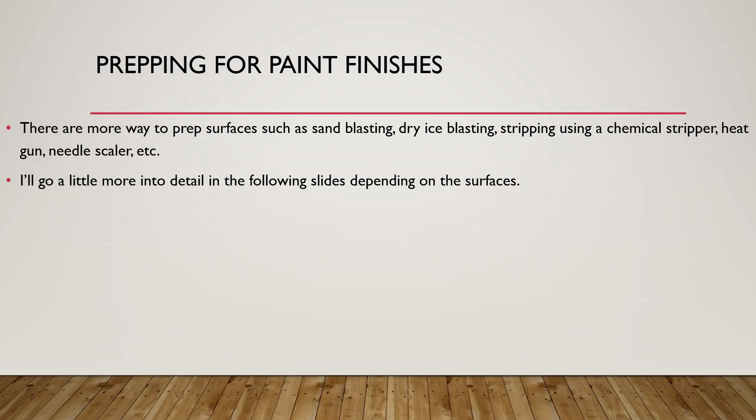There are many ways to prep surfaces, such as sandblasting, dry ice blasting, stripping using chemical stripper, heat gun, needle scaler, whatever. There are multiple ways of prepping a surface apart from sanding and using grinders and brushes. I'll go into more detail in the following slides depending on the surface, but that'll be later on.

So, preparing for paint finishes - how do you prepare for that? Most likely you're going to move a client's things if they're present. Typically, a lot of clients will leave their stuff even after you told them to move it. So you always got to consider that.

You're going to want to protect the work site using plastic, rosin paper, drop cloths, ram board, or whatever you're going to use. Tape should be used on the surface being taped. I'll go into detail on that later.

You'll prep based on information mentioned previously, depending on the location. Remember to always check for humidity and moisture. This is a sign that you'll need to degrease before you do any other step. Kitchens and bathrooms are almost a guarantee.

If removing wallpaper, make sure to remove the glue underneath completely, or it will blister the paint on the wall. So if you ever remove wallpaper, you know that you're gonna want to wet the wallpaper. They even sell these little scuffing pads, but I've never done that - I just give it a light sanding and start wetting.

Underneath, though, you're gonna get some glue. Make sure you get some TSP, some Goof Off, mix it in with some water and clean those walls, because that glue will be on there for a long time if you don't clean it. So get your sponges, your scotch pads, whatever you're gonna need.

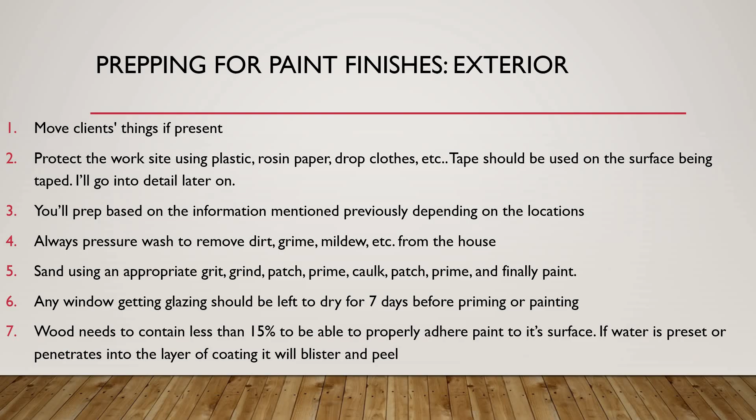All right, composition of paints in construction. There are 5 main properties in paints. These are pigments, and what they do is they provide color, opacity, and sometimes corrosion resistance. There's binders, also known as resins - they help the paint adhere to surfaces and form a protective film.

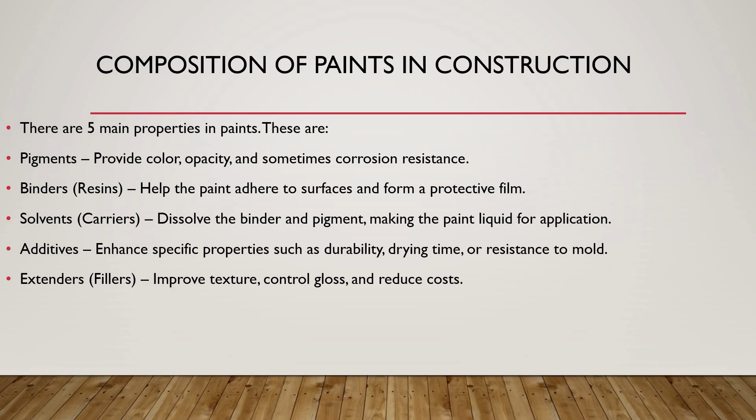You got solvents, so carriers - it dissolves the binder and pigment, making the paint liquid for application. You got additives, which enhance specific properties such as durability, drying time, and resistance to mold. And finally, you got extenders, also known as fillers - this improves the texture, controls the gloss, and reduces the cost.

So these properties have different jobs in the paint product. You got adhesion, the ability to stick to different surfaces like concrete and metal. You got durability - all these properties are affected differently. You got the resistance to environmental conditions like UV exposure, moisture, and abrasion.

You got opacity, also known as hiding power - the ability to cover the surface and conceal underlying materials. You got your drying time, the time required for the paint to set and properly cure. Some paints dry in 1 day, some take 7 days to fully dry out - that all depends on what's been added to the paint. You got your gloss and sheen, the level of light reflection.

So it could be satin, matte, high gloss, etc. You got your weather resistance, right? The protection against rain, humidity, temperatures. Chemical resistance, ability to withstand exposure to chemicals, oils, and solvents. Flexibility, resistance to cracking and peeling due to expansion. You got washability, ease of cleaning without damaging the paint. You got toxicity and VOC content. So a lower volatile organic compounds reduce environmental and health hazards.

So just remember, these are little keywords when it comes to painting. Most likely this will be brought up on the exam. So you don't got to know everything in painting when it comes to wording or vocabulary, but these are some of the most important parts.

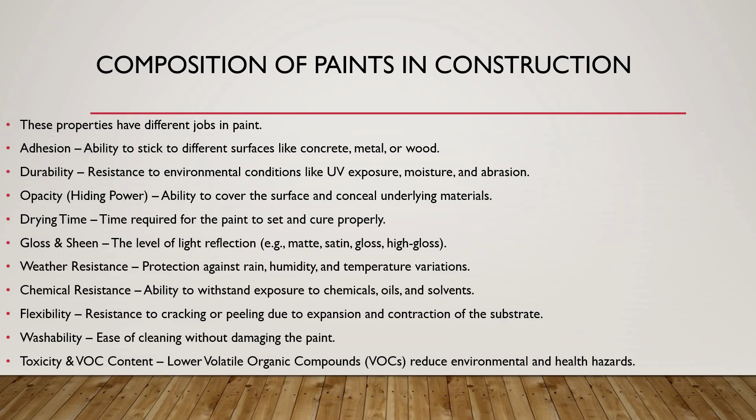So we're going to go into detail what each one means. So adhesion ensures the paint sticks well to the surface, preventing peeling and flaking over time. And this is important for surfaces like concrete, metal, or wood, which may require primers for better adhesion.

You got durability, determines how long the paint lasts under different conditions, right? High durability means the paint resists fading, cracking, and peeling over years of exposure. You got opacity, hiding power. So it defines how well the paint covers the surface underneath.

So typically, what color are you painting, right? So if it's like a super dark color and you're gonna go with the lighter on top, you want something that's gonna cover that dark color. This will affect the number of coats required to completely cover a previous color or stain.

You got your drying time. This will impact how quickly the paint sets after application. Faster drying times can speed up construction projects, but may require careful environmental conditions.

You got your gloss and sheen. So glossy paints reflect more light and are easier to clean, but may highlight imperfections. Matte finishes hide surface flaws but are harder to clean and maintain. So remember, the glossier, the better it is to clean, and the flatter, the harder it is. But again, gloss you'll see everything more in view in terms of all defects, and if you go with the flatter finish, of course you're going to see less imperfections.

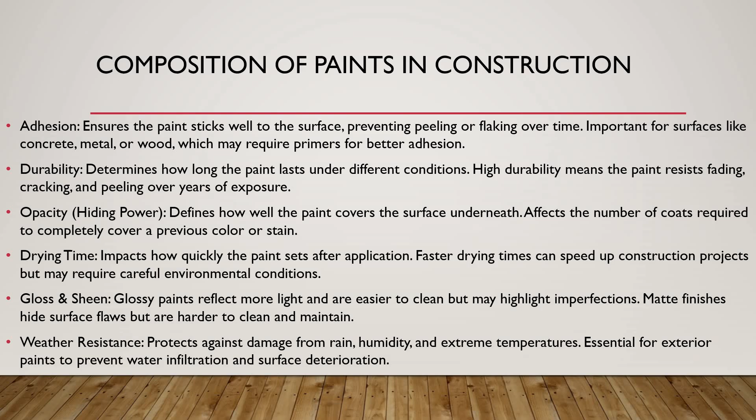So weather resistance protects against damage from rain, humidity, temperature exposure, essential for exterior paints to prevent water infiltration and surface deterioration.

So what's chemical resistance? Chemical resistance helps the paint withstand the exposure to cleaning agents, acids, oils, and other chemicals. It's important for industrial or high traffic areas where exposure to chemicals is frequent.

Flexibility allows the paint film to expand and contract with temperature changes without cracking, crucial for exterior paints, especially in areas with significant temperature fluctuation.

Washability determines how easily stains and dirt can be wiped off without damaging the paint. So higher washability is needed for kitchens, bathrooms, and commercial spaces.

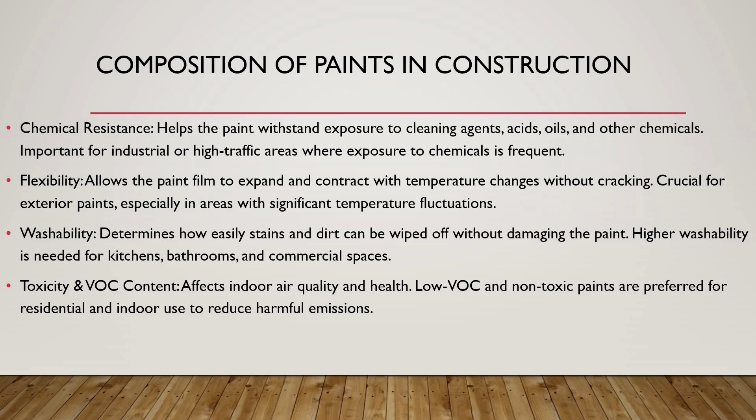You got toxicity and VOC contents. This will affect indoor air quality and health. Low VOC and non-toxic paints are preferred for residential and indoor use to reduce harmful emissions.

So what are solvents? Solvents are liquids used to dissolve and disperse the binder, the resin, pigments, additives in paints, making it easier to apply. Once the paint is applied, the solvents evaporate, leaving behind a solid film.

So what are the functions of solvents in paints? So this will adjust viscosity, meaning it controls the thickness of the paint for smoother applications. It improves application, so helps the paint spread evenly on surfaces using brushes, rollers, and sprayers.

And this will also aid in drying. So solvents will evaporate after application, allowing the paint to harden and form a durable coating. This will also prevent clumping, so it keeps paint ingredients well mixed and prevents premature drying in the can, and enhances surface penetration, so it helps paint seep into porous surfaces like wood and concrete for better adhesion.

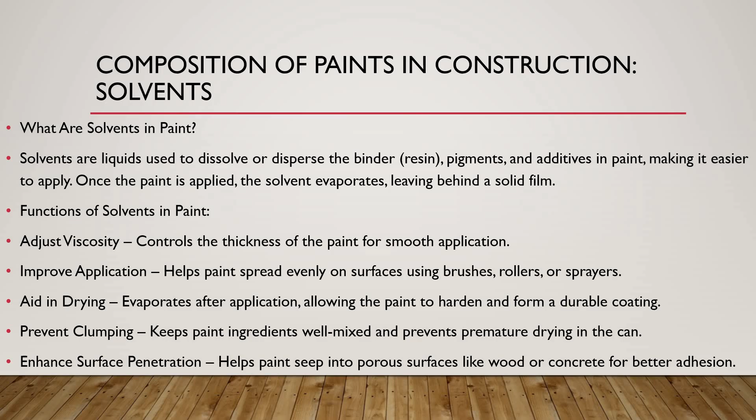So what type of solvents are in paint? So you got water, which is water-based paints used in latex and acrylic paints. So they got low toxicity, low odor, and are environmentally friendly. You got faster drying time and easy cleanup with water.

Next, you would have your organic solvents. This is better known as oil-based paints. So used in alkyds, epoxies, polyurethanes, enamel paints. So stronger adhesion and durability, but higher VOCs. So it's more dangerous, more toxic.

An example of these that I'm pretty sure you guys have all seen are your mineral spirits, so common in alkyd paints. You got your turpentine, traditionally used for oil-based paints. You got your xylene and toluene, found in industrial coatings. You got your acetone and alcohol, so used in specialty paints and primers.

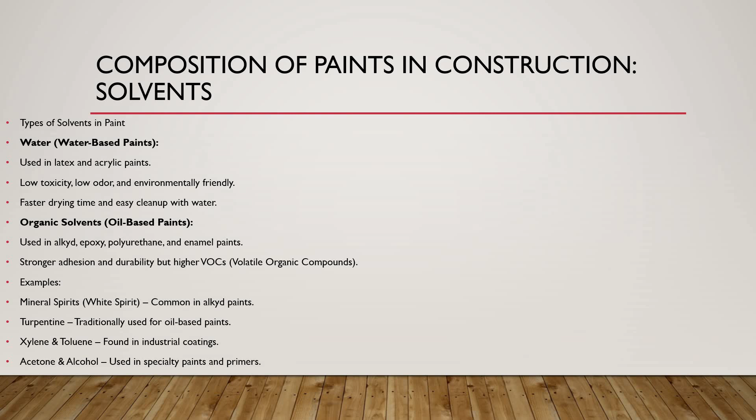So I'm just gonna give you guys a little quick heads up on the paints there are. The paint type: you got your latex or acrylic paint. The solvent will be your water base, low odor, easy cleanup, and quick drying.

You got your alkyd paints, which is your oil-based paint. The solvent would be mineral spirits and turpentine. It's better because it has a strong adhesion, but it does take longer to dry, obviously.

You got your epoxies, typically, and your polyurethane paints. Typically these are made from xylene or toluene. It has high durability and chemical resistance.

You got your lacquers and industrial coatings. Typically these are made from acetone or alcohol, and they're fast drying and produce a high gloss.

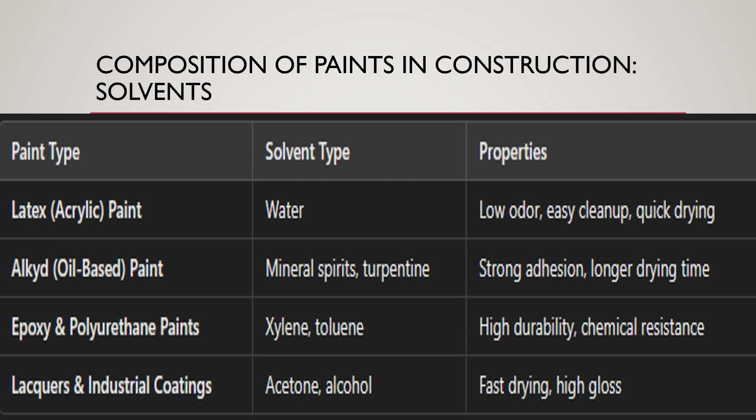What are binders in paint? Binders, also known as resins, are the film-forming components in paint that hold the pigment particles together, and help paint adhere to a surface. Once the solvent evaporates, the binder hardens to form a protective and durable film.

Functions of binders in paint: adhesion - it helps the paint stick to surfaces like wood, metal, and concrete or drywall. Durability - determines the paint's resistance to weather, moisture, and wear. Flexibility - it helps prevent cracking and peeling by allowing the paint film to expand and contract.

It also controls, or helps with, the gloss and finish, so this will control the sheen level - whatever you're choosing. So it could be a matte, satin, semi-gloss, high gloss, whatever it might be.

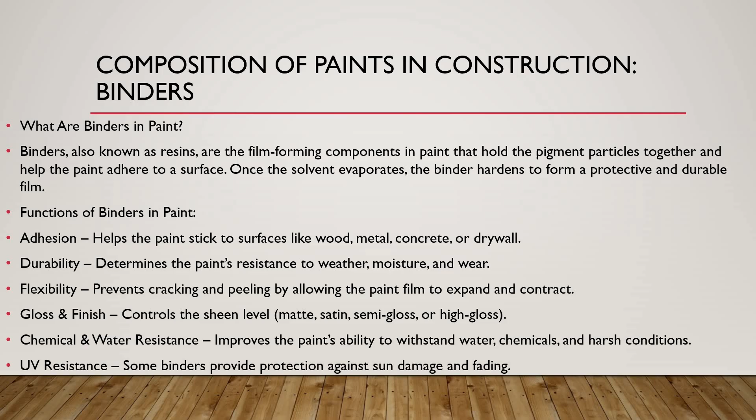You got chemical and water resistance, right? It improves the paint's ability to withstand water, chemicals, and harsh conditions. And it will also provide UV resistance - some binders provide protection against sun damage and fading.

And here we have basic binder types. If we're dealing with acrylic, remember this will typically be latex paints and exterior paints. So you got quick drying and UV resistance if it's for exterior, and it's flexible.

If you're dealing with any alkyd paints, so oil based, the common uses for that would be for wood, metal, industrial paints. So the properties would be that it's durable and glossy and slow drying.

An epoxy will typically be used in industrial and marine and flooring paints. So of course it's going to have strong adhesion and chemical and water resistance.

If you're dealing with polyurethane, it will typically be used in wood finishes and floor coatings. So it's tough, abrasion resistant, and glossy.

If you're dealing with vinyl, it will typically be used for interior latex paints, and it's an economy paint. So it's typically affordable, not expensive. It has good adhesion, it's cost effective, however it is less durable than acrylic.

You also have your silicone binder. Silicone binders offer high temperature coatings and waterproof paints. Typically these are used like on roofings - on roof coatings where you got flat roofs, and you would roll on the roofing material. So it's heat resistant, water repellent, and flexible.

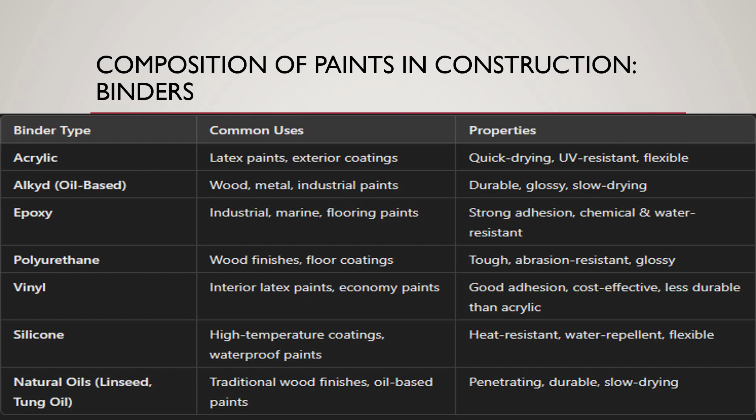So how do binders affect paint performance? Acrylic binders are common in water-based paints. They offer flexibility, quick drying, and UV resistance. Alkyd binders are found in oil-based paints, providing durability and a smooth finish, but require longer drying times.

Epoxy and polyurethane binders are used in high-performance coatings for industrial, marine, and flooring applications. Silicone binders make paint resistant to heat and moisture, making them ideal for waterproofing and exterior protection.

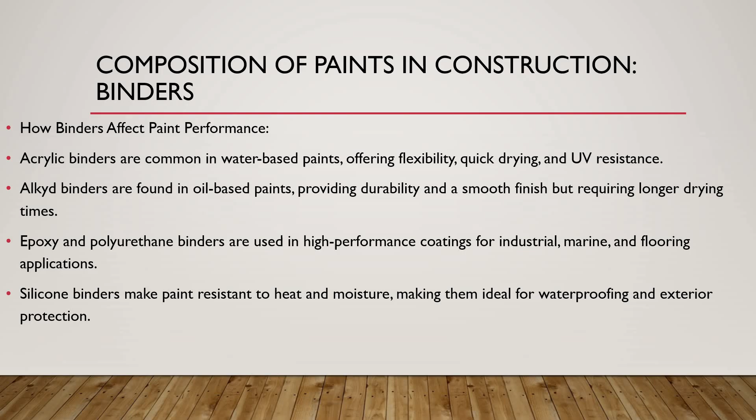What are pigments in paints? So pigments are finely ground solid particles that give paints their color, opacity, and protective properties. They do not dissolve in the binder or solvent, but remain suspended in paint mixtures. So they stay throughout the paint, right? They're not at the bottom, they're at the top. They're moving constantly.

The functions of pigments are to provide color - this will determine the paint's appearance from bright hues to neutral tones. It improves opacity, right, the hiding power, because obviously what color are you going to be going over? So it helps cover underlying surfaces and previous colors.

It enhances durability - some pigments protect against UV rays, corrosion, and weathering. It increases reflectivity or absorption - some pigments influence how heat and light interact with the painted surface. It reduces cost - extender pigments help bulk up the paint while maintaining quality.

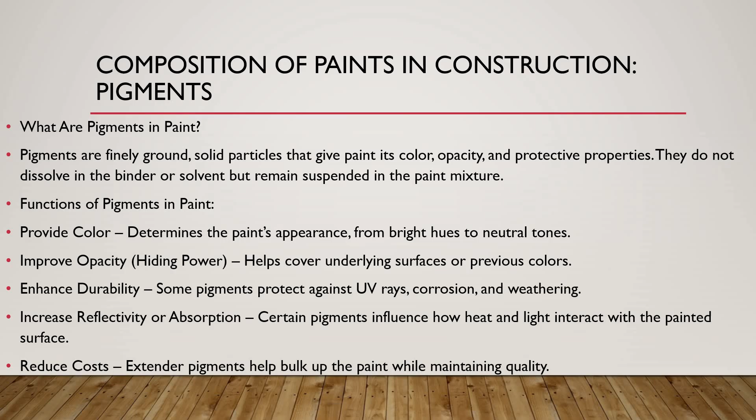So, types of pigments in paints. Prime pigments, also known as color pigments, provide actual color and opacity in the paint. An example would be titanium dioxide.

It's a bright pigment with excellent hiding power. You've got iron oxide, which provides reds, yellows, and brown shades common in industrial and exterior paints. You've got carbon black, used for deep black shades and coatings in automotive paint. You've got chromium oxide green, a stable green pigment often used in exterior and industrial applications. And ultramarine blue, a deep blue pigment used in artistic and decorative paints.

So these are all different pigments in paints, and of course there's more - there's mixes, there's a bunch of stuff out there. We also have extender pigments, also known as fillers. Each one does something different. These extender pigments improve texture, strength, and cost effectiveness, but do not contribute to color.

The ones on top are called color pigments, and they offer the look of whatever color you want. The ones on bottom just help with the next step in paint - the texture and the strength. An example would be calcium carbonate, that's chalk. It reduces the gloss, also known as a flattener, improves adhesion, and enhances durability.

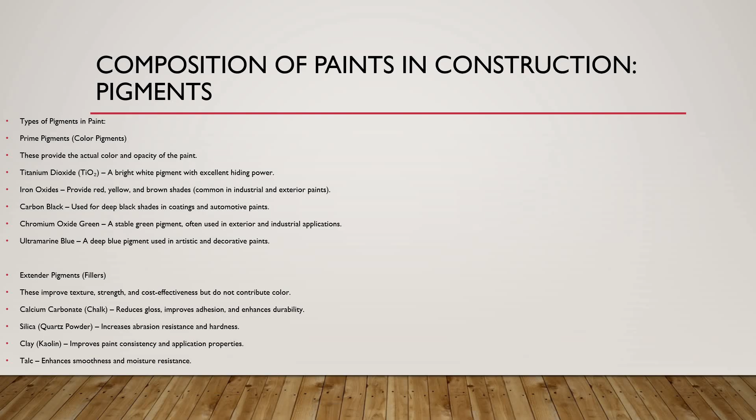You've got silica, your quartz powder - it improves abrasion resistance and hardness. You've got clay, also known as kaolin - it improves paint consistency and application properties. And you've got talc, which enhances smoothness and moisture resistance.

You've got your special effect pigments as well - these provide functional properties beyond color. Metallic pigments, also known as aluminum, bronze, zinc dust, are used in coatings for corrosion resistance and reflective finishes.

You've got fluorescent and phosphorescent pigments - these would glow in the dark or offer high visibility coating. This would be like for the streets or any marked area for parking.

You've got anti-corrosion pigments, so this would be your zinc phosphate and red lead. It protects metal surfaces from rust - remember, this would be more like your rust inhibiting primer. And you've got thermochromic and photochromic pigments - these change color with temperature and light exposure.

How do pigments affect paint performance? The more pigments you have, the better hiding power, so your higher opacity. High quality pigment resists fading under UV light and weather exposure. Certain pigments improve durability, preventing rust or chemical damage.

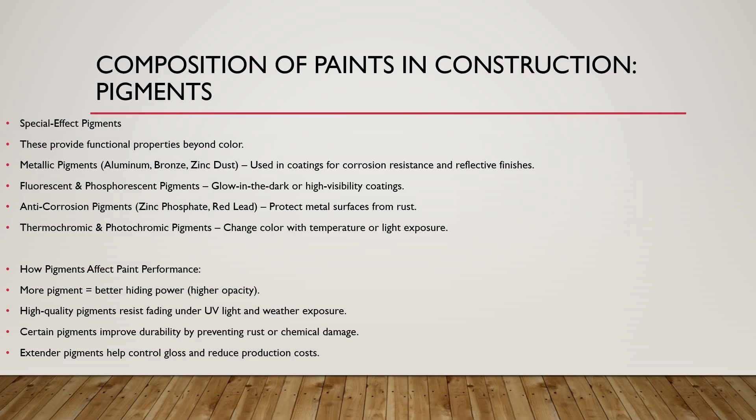Extender pigments help control gloss and reduce production costs. So remember, the more pigments in the paint, the better - that's pretty much what this is saying.

So, what are additives in paints? Additives are special ingredients added in small amounts to enhance the performance, durability, and application properties of paint. They improve characteristics such as drying time, resistance to mold, ease of application, and weather protection.

Functions of additives in paint are what? It will improve flow and leveling, preventing brush or roller marks for a smooth finish. It will control drying time, speeding up or slowing down drying based on environmental conditions. It will enhance durability, providing resistance to moisture, UV rays, chemicals, and abrasion.

It will also prevent mold and mildew growth, which is essential for high humidity areas like bathrooms and kitchens. Another function would be to reduce surface defects, preventing issues like bubbling, sagging, and cracking. And lastly, it will modify gloss and texture, controlling the sheen and feel of the dried paint - some paints are rougher, some are smoother. That's what it means by that.

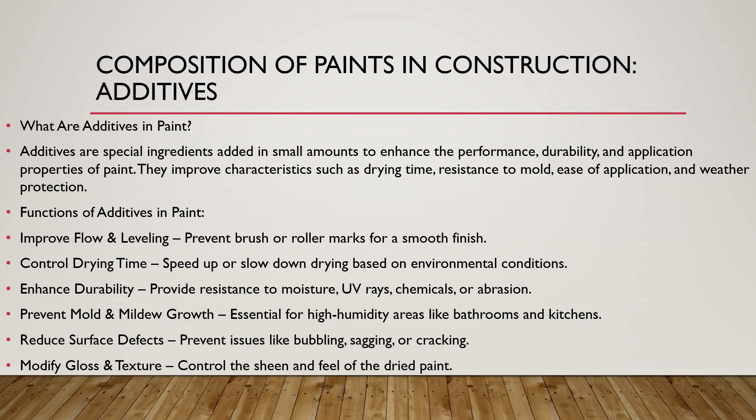So here we have the types of additives that are in the paint. You've got anti-settling agents - this will prevent pigments from settling in the can, so it helps so that it doesn't stay at the bottom where it will settle down. This helps maintain consistency in stored paint.

You've got your thickeners and rheology modifiers - this will control the viscosity, the thickness, preventing dripping and improving application. You've got your drying accelerators, your catalysts - if you don't know what a catalyst is, it's pretty much like a two-part epoxy. You've got your regular paint, and then you've got your hardener.

That's what a catalyst is. It speeds up drying time, useful in cold weather or for quick drying paints.

You've got your retarders, slow drying agents. Instead of accelerating the drying process, they make it dry out slower, helping you work with the product more. It slows down drying time, which helps when painting in hot or dry climates.

You've got your UV stabilizers, which protect against sunlight and fading, typically used in exterior paints and automotive coatings. And your anti-foaming agents, which prevent bubbles and foaming, ensuring a smooth, uniform finish.

You've got your fungicides or mildewcides, which prevent mold and mildew, typically used in bathrooms, kitchens, and humid environments. Corrosion inhibitors protect metal surfaces from rust, typically used in industrial and marine coatings. Adhesion promoters improve paint grip on difficult surfaces, typically used on plastic, metal, and glass coatings.

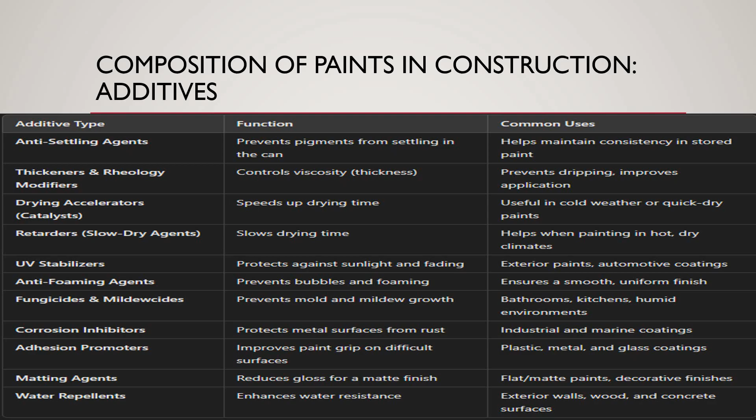So how do additives affect paint performance? Anti-foaming agents prevent air bubbles that can ruin a smooth finish. Thickeners help paint stick to vertical surfaces without dripping. This is why some paints run faster than others - even just brushing it on, some paints just won't stick no matter what, and you'll get runs, drips, and little saggings going on.

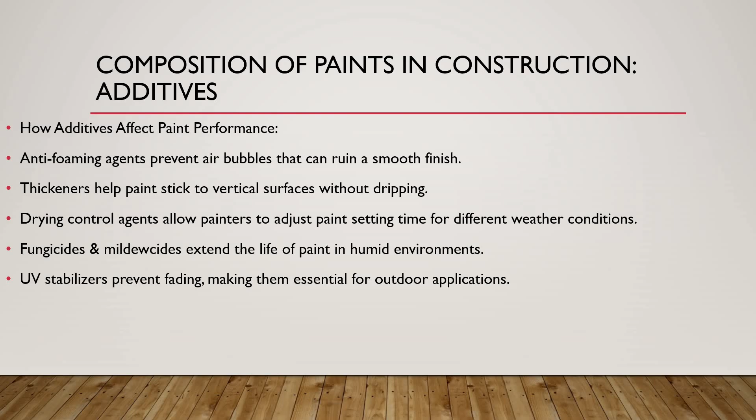You've got your drying control agents, which allow painters to adjust paint setting time for different weather conditions. Fungicides and mildewcides extend the life of paint in humid environments. And UV stabilizers prevent fading, making them essential for outdoor applications.

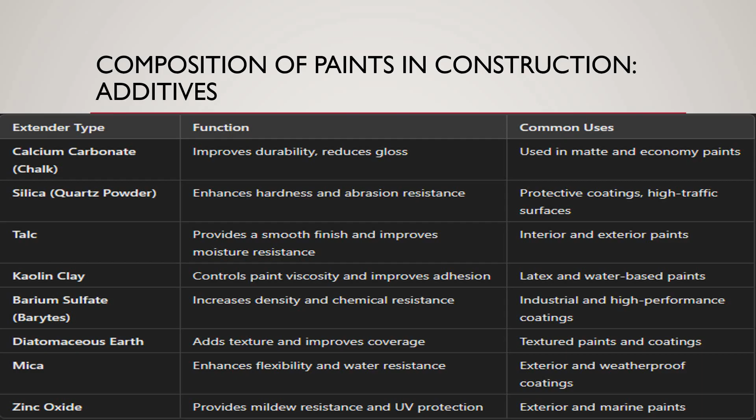So how do extenders affect paint performance? Higher extender content means lower gloss. The more you extend or reduce the paint, the flatter it's going to start looking, and it's going to start affecting the color that it has. Silica-based extenders increase hardness, making paint more durable for floors and industrial use.

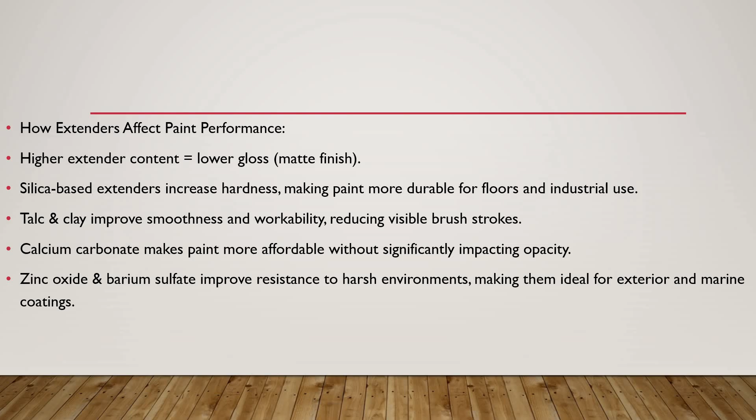You've got your talc and clay, which improve smoothness and workability, reducing visible brush strokes. Calcium carbonate makes paint more affordable without significantly impacting opacity. And zinc oxide and barium sulfate improve resistance to harsh conditions, making them ideal for exterior and marine coatings.

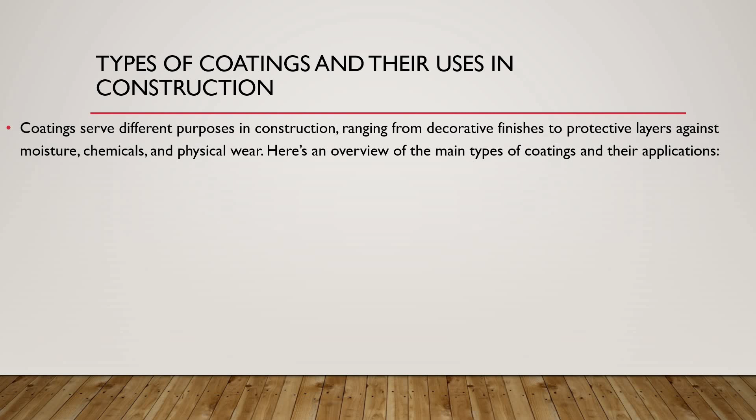Now we're going to go into something different: types of coatings and their uses in construction. Coatings serve different purposes in construction, ranging from decorative finishes to protective layers against moisture, chemicals, and physical wear. Here's an overview of the main types of coatings and their applications.

So these are your basic paints that most likely your store has. What's the purpose of a paint? The purpose of it is to provide color, aesthetics, and some level of protection against weather, moisture, and UV rays. That's why you paint an exterior - it's not just to make it look good, it's also to protect the wood, to protect the building from exposure to weather, bugs, dust, and anything that could enter a home. That's what it's meant for, apart from giving it a good amount of color to make it stand out.

So we're going to go with paint types. Acrylic, also known as latex paint, is a water-based paint. It's quick drying and has low VOCs. It's typically used in interior and exterior walls and ceilings.

You've got your alkyd-based paints, which give a durable, smooth finish and have a longer drying time. This is typically used on wood, metal, trim, and doors. You've also got your epoxy paints.

This is typically used for its high durability and chemical resistance. It's typically used in industrial floors, garages, and marine applications.

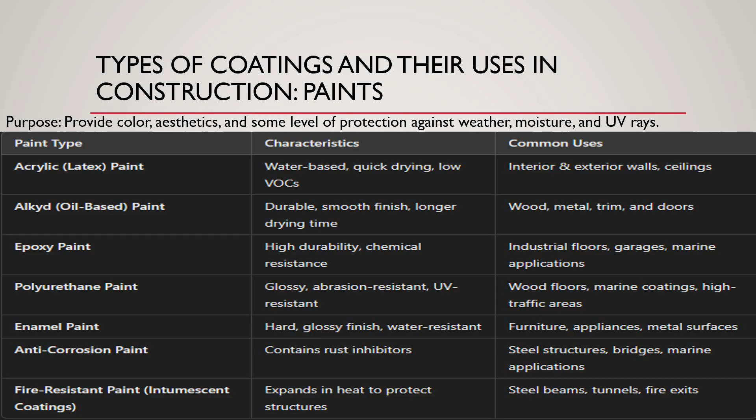So what are sealers and primers? The purpose of a sealer and primer is to improve adhesion, block stains, prevent moisture penetration, and enhance the durability of top coats.

An acrylic primer seals porous surfaces and improves adhesion. This can typically be used on drywall, masonry, and previously painted surfaces.

Next up is your alkyd primer. It offers better penetration, but has a longer drying time. This will typically be used on wood, metal, and exterior surfaces.

Shellac-based primer is your strong stain blocker. It will block smoke damage, water stains, and wood knots.

You've got your concrete sealers. This will protect against moisture, chemicals, and wear. Typically used on concrete floors, driveways, and basements.

You've got your waterproofing sealers. This will create a water-resistant barrier. This is typically used in basements, foundations, and bathrooms.

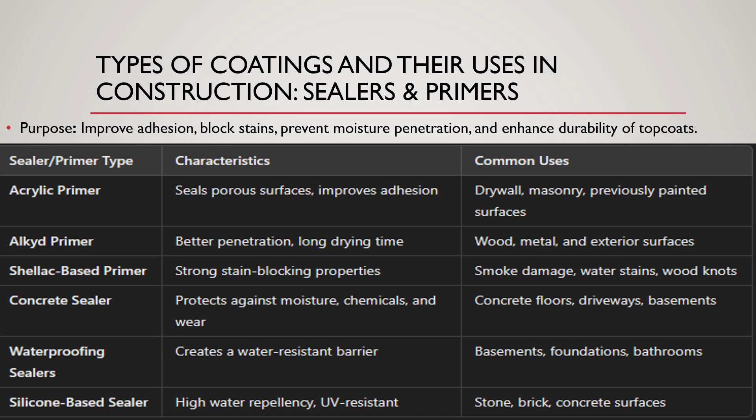Lastly, you'd have your silicone-based sealer. This offers high water repellency. It is UV resistant and is typically used on stone, brick, and concrete surfaces.

Now we're going to go on to epoxy coatings. The purpose of epoxy coatings is that it's a heavy duty coating providing chemical resistance, durability, and waterproofing. So there are different types of epoxy. What are they?

100% solid epoxy is thick, self-leveling, and highly durable. Typically this will be used in industrial floors, factories, and warehouses.

You've got your solvent-based epoxy. This will penetrate the surface and has good adhesion. This will be used on concrete coatings and garages.

You've got your water-based epoxies. The water-based epoxy offers lower VOCs and easier application, and is typically used in commercial floors, hospitals, and homes.

You would then have metallic epoxy. This is more of a glossy decorative finish. This will be used in showrooms, restaurants, and high-end interiors.

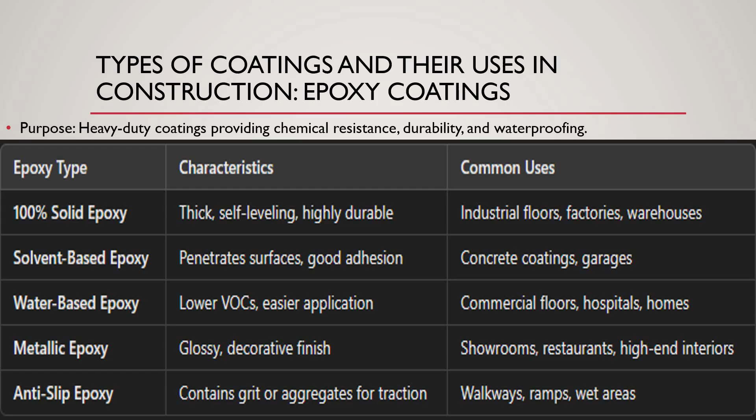Lastly, you'd have your anti-slip epoxy. This contains grit or aggregates for traction. This will be used in walkways, ramps, and wet areas.

Now we have polyurethane coatings. The purpose of a polyurethane is to provide a high gloss, UV resistant, and abrasion resistant surface. We've got different types of polyurethane.

Those would be your aromatic polyurethane. It has high durability, but it's UV sensitive, so it's not going to last long in the sun. This would be more for interior use, for industrial coatings and chemical plants.

You've got your aliphatic polyurethane. This is UV resistant and has a glossy finish. Because of its UV resistance, it would typically be used in outdoor furniture, floors, and automotive coatings.

And lastly, you've got your moisture cure polyurethane. It is tough and chemical resistant, and it's typically used in wood floors, gymnasiums, and marine coatings.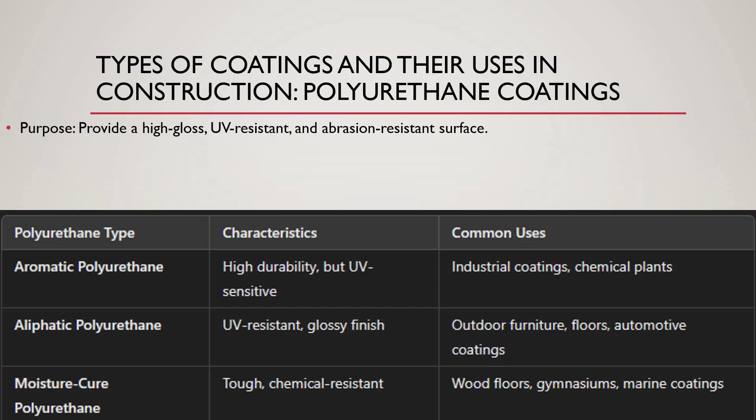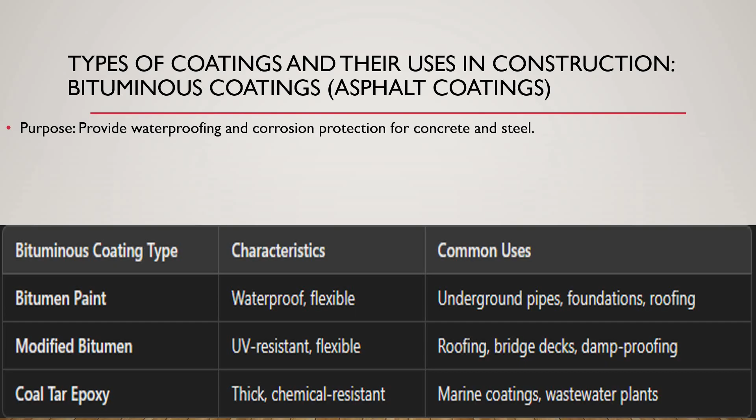You got your modified bitumen. It is UV resistant, flexible, and typically used in roofing, bridge decks, and damp proofing. You got your coal tar epoxy. Think of this as a thick, chemical resistant epoxy. It will be used in marine coatings and wastewater plants.

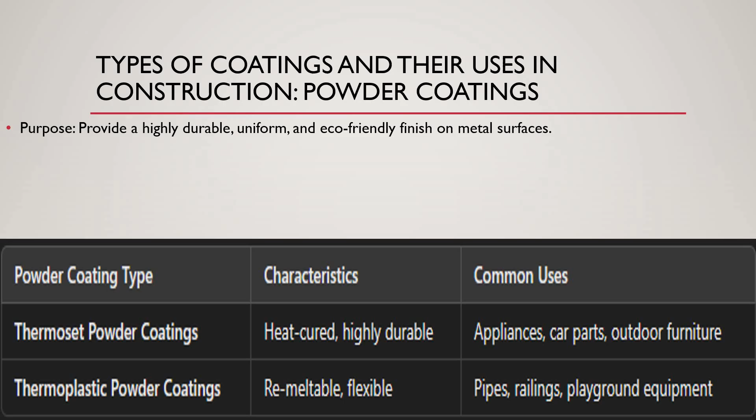So let's go on to powder coatings. What do they do? They provide a highly durable, uniform, and eco-friendly finish on metal surfaces. You would have only two types of this sort of coating. You got your thermoset powder coating, it's heat cured, highly durable, and typically used on appliances, car parts, and outdoor furniture. You got your thermoplastic powder coating, it is remeltable, flexible, and typically used in pipes, railings, and playground equipment.

You got your anti-corrosion coatings. Typically this will prevent rust and degradation of metal surfaces. So this will prevent rust from forming and help it stay as good as it can get when you're dealing with exterior metal, because over time it will rust.

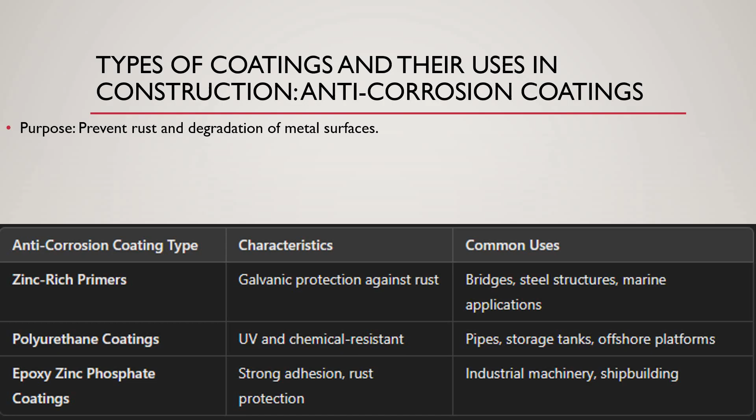So these are anti-corrosion coating types. You got your zinc-rich primers, so it's galvanic protection against rust, typically used in bridges, steel structures, marine applications. You got your polyurethane coatings, this will be UV and chemical resistant, typically used in pipes, storage tanks, offshore platforms. And you got your epoxy zinc phosphate coating, it has strong adhesion, rust protection, and will be used in industrial machinery and shipbuilding.

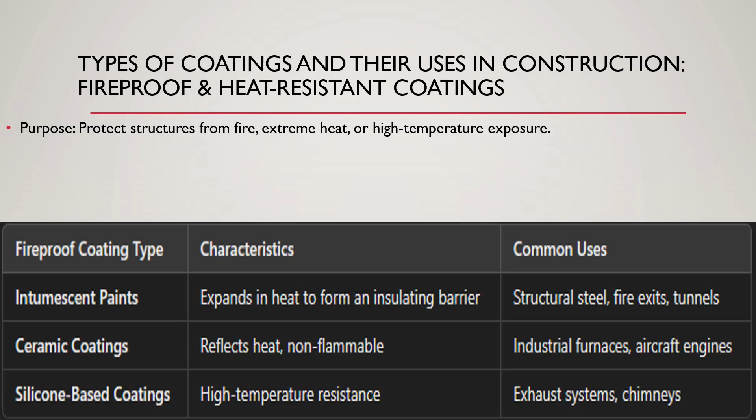Now we have fireproof and heat resistant coatings. What do they do? Well, it protects structures from fire, extreme heat, and high temperature exposures. You got your intumescent paints, expands in heat to form an insulating barrier, will be used in structural steel, fire exits, and tunnels. You got your ceramic coating, this will reflect heat and it's non-flammable, typically in industrial furnaces, aircraft engines, etc. And you got your silicone based coating, this is high temperature resistant, typically used in exhaust systems and chimneys.

You got your waterproof and hydrophobic coatings, these type of coatings repel water, prevent moisture damage, and improve longevity of structures. So we got your elastomeric coatings, it's flexible and it bridges small cracks, typically used on concrete walls, stucco, and roofs.

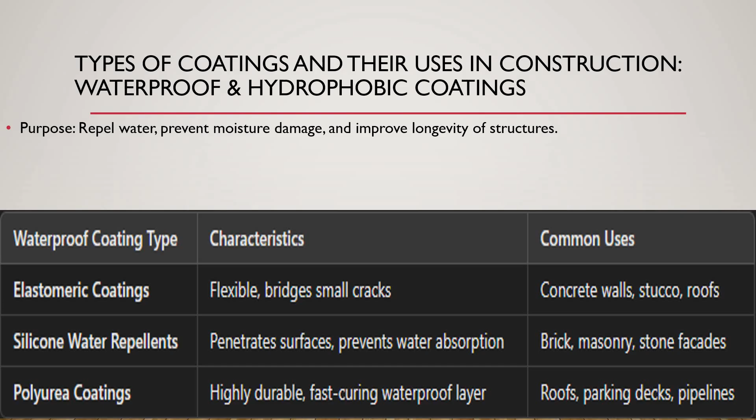You got silicone water repellent, so this will penetrate surfaces. So sorry about that - silicone water repellent will typically penetrate a surface, it prevents water absorption, blocking those cracks. Typically used in brick, masonry, and stone facades. And polyurea coating, it's highly durable, fast curing, a waterproof layer, used in roofs, parking decks, and pipelines.

Remember, this is just a basic list of coating types in the painting industry. There are more than these, and in other industries even so. The painting trade is constantly changing, so always update your knowledge. Remember, guys, if you don't want to go one by one like I just did, that's fine. You don't got to worry about all these coatings, it's just a good idea to understand it. Remember that the state's going to typically just ask you on the basic coating type - you got your oil-based, water-based, latex, alkyds, etc.

You might get a question that tells you, hey, if you're going to be painting a room, what type of paint are you gonna get? It's just a simple question like that, and it might offer 4 different answers. One might say latex, and the next two might say water based. One might say alkyd, oil based. Another might say epoxy. Another might say an enamel. Most likely, if you know the basic types of paints and what they're used for, you're gonna go with the latex paint, because it's water based. California is pretty much water based. Latex is the only one that's suitable for a wall. So those are the type of questions you're gonna get.